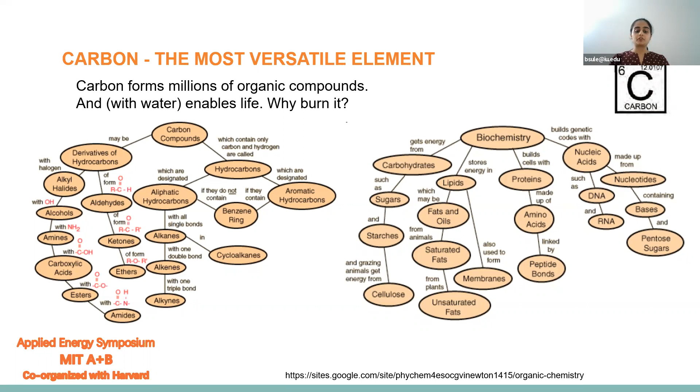Our topic for today's presentation is Shale Gas to Carbon Fiber, a cleaner pathway from fossil fuels to the hydrogen carbon economy. Carbon is the most versatile element and forms millions of organic compounds. Carbon, along with water, enables life. So our main argument is that we should value carbon so much that we should not burn it as a fuel, and instead use it to make more valuable products.

The use of carbon fibers has been increasing in recent years, and in terms of large volume applications, there is a great potential to expand the market for structural material based on carbon fiber that can replace steel and aluminum. However, the cost of carbon fiber currently is around $10 per kg, which is very high as compared to steel, which is less than $1 per kg. Thus, one of the main challenges is to reduce the cost of carbon fiber in order to make it suitable to replace steel in large volume applications.

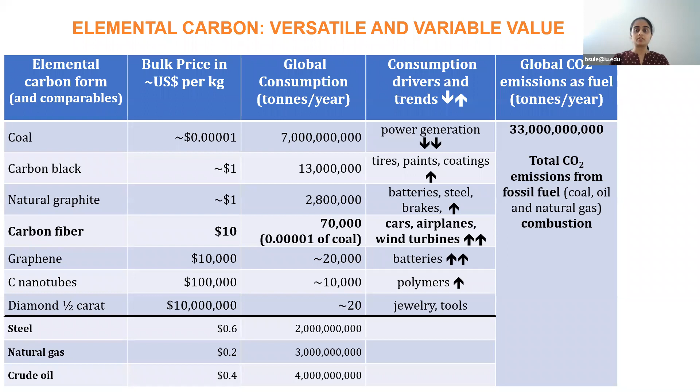The table also shows the global consumption of other fossil fuels, natural gas and crude oil, and also the global CO2 emissions due to combustion of all the fossil fuels. This carbon is not only too valuable to oxidize, but it is also too dangerous when oxidized. It forms carbon monoxide, which is a toxin, as well as carbon dioxide, which is a greenhouse gas, which has huge environmental issues.

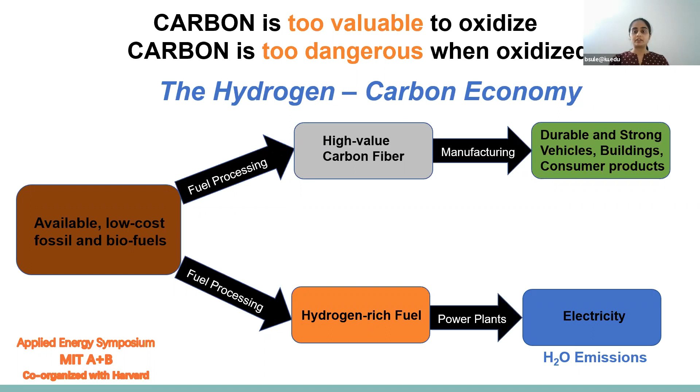The idea behind the hydrogen carbon economy is that the available low-cost fossil and biofuels can be processed in such a way that the carbon and hydrogen components of it can be separated. The hydrogen part can be used as a hydrogen fuel or hydrogen-rich fuel in power plants to generate electricity, and it is also harmless in terms of emissions. From the remaining carbon part of hydrocarbons, you can get high-value carbon products such as carbon fiber, which has great potential as a structural material in vehicles, buildings, and consumer products.

US has abundant gaseous fuels like natural gas, and shale gas has a large proportion of ethane in it. In ethane, about half of the energy content comes from carbon and about half of it comes from hydrogen. Thus, if you separate the hydrogen and carbon part, you would still have roughly about half of the energy in the form of hydrogen, which you can burn and use as a fuel. And the remaining carbon part, you can use to make some useful product or a more valuable product.

So carbon, when oxidized, forms carbon dioxide, which, just like water, has no useful energy content. Thus, if you want to make something useful now from carbon dioxide, you need to add energy to it. So our main argument is that we should stop generating carbon dioxide in the first place, and instead use the carbon to make some useful product from it.

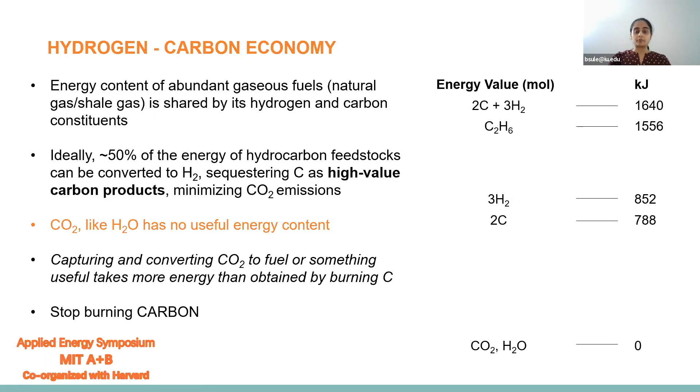Two of the high value carbon products that are used as structural materials are carbon nanotubes and carbon fiber. Multi-wall carbon nanotubes have the highest tensile strength of any material, and they have a tensile specific strength of about 1,000 times that of low carbon steel.

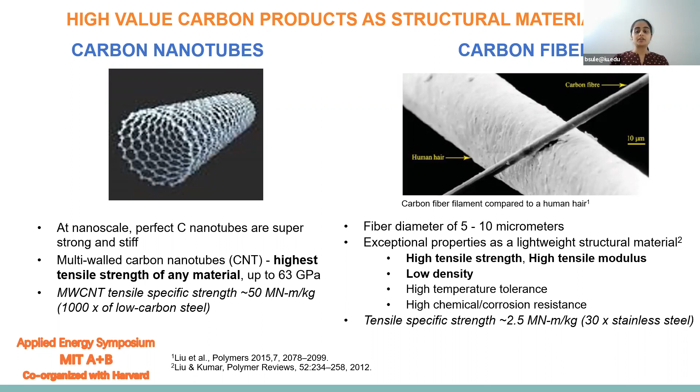Carbon fiber also has exceptional properties as a lightweight structural material. It has high tensile strength, high tensile modulus, as well as high chemical corrosion resistance, and has a tensile specific strength of 30 times that of stainless steel. However, carbon nanotubes are currently very expensive for use in large volume applications, and our focus today is on carbon fiber, particularly carbon fiber from shale gas.

Carbon fiber has many applications in aerospace, high-end automobiles, sports equipment, wind turbines, and pressure vessels. Roughly a quarter of it is used in wind turbines, and a significant proportion is also used in the aerospace industry. Some part is used in automotive as well as pressure vessels. These four applications make about 51% of the total carbon fiber market in the US.

Carbon fiber is also considered a clean energy technology since it is useful for pressure vessel applications for storage of compressed natural gas and hydrogen.

Currently, carbon fiber is only used in high-end automobiles because it is expensive. But if you could somehow bring the price down, then you can use it in all automobiles that are there today, and that would mean a very large-scale market for carbon fiber.

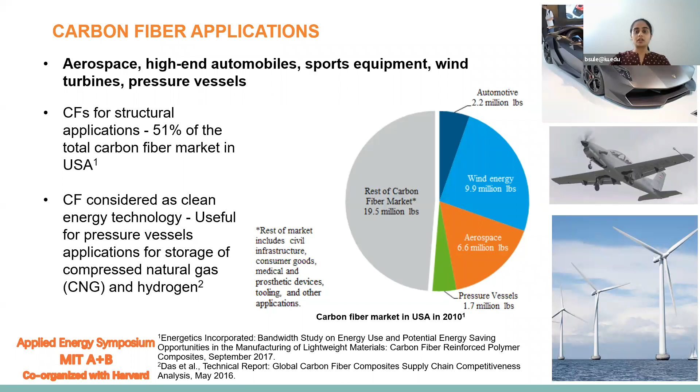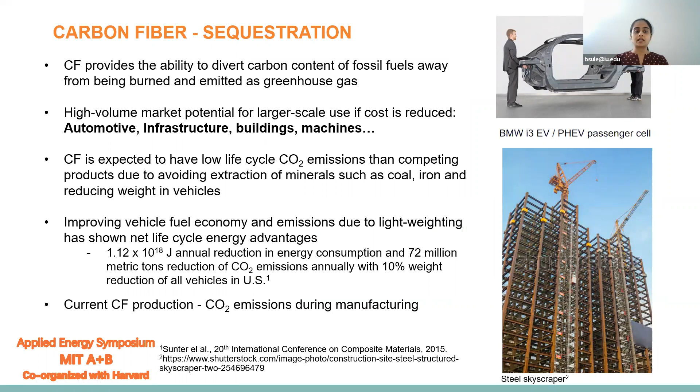Use of carbon fiber in large volume applications such as automobiles provides the ability to divert the carbon content of fossil fuels away from being burned and emitted as greenhouse gas. Carbon fiber is expected to have lower life cycle CO2 emissions than competing products due to avoiding extraction of minerals such as coal, iron, and reducing weight in vehicles.

If you consider a mid-sized steel car of around 1500 kg curb weight and replace the steel structural components with carbon fiber, there is a potential annual carbon fiber demand for the automotive industry of around 1500 million pounds, whereas the current automotive market in the US is only 2.2 million pounds. Thus, there is a large volume market opportunity for carbon fiber in the automotive industry.

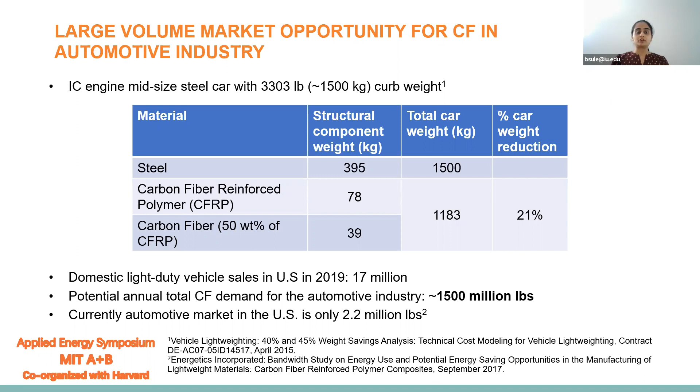Now coming to the carbon fiber precursor. These precursors are key to carbon fiber, and there are various organic polymers such as polyacrylonitrile derived from petroleum, which is the most common precursor used in carbon fiber manufacturing currently, and it forms the best quality carbon fibers. The other precursors are rayon and petroleum pitch.

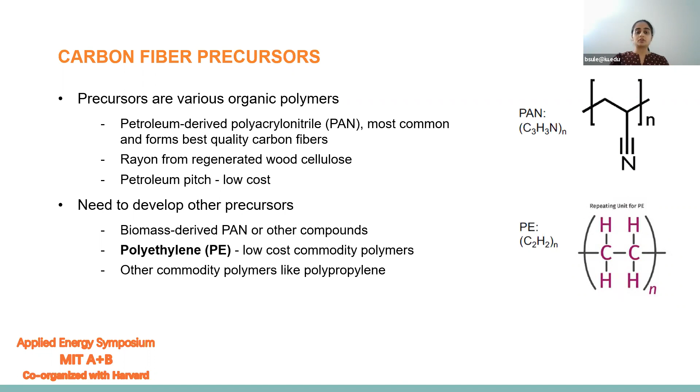There is a need to develop other low-cost precursors, and one such is polyethylene, which is a low-cost commodity polymer.

The major steps in carbon fiber manufacturing are polymer precursor synthesis, fiber spinning, thermal stabilization, carbonization, and the final step is surface treatment. Out of the total carbon fiber annually produced, more than 90% is PAN-based due to the high fiber quality. Here you can see the PAN-based carbon fiber cost breakdown, and the PAN precursor accounts for more than 50% of the carbon fiber cost. This is due to the expensive solution spinning process as well as the high commodity price of PAN.

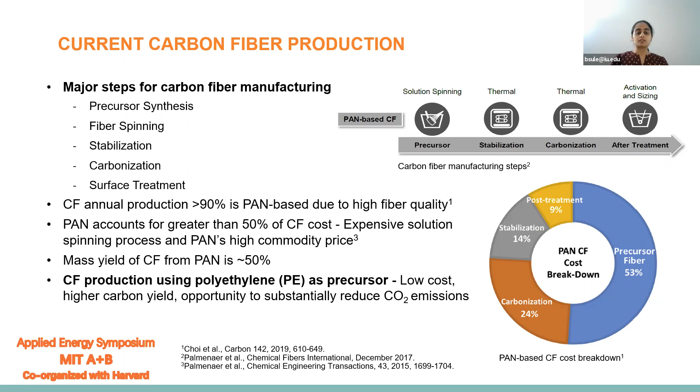Carbon fiber using polyethylene as precursor provides advantages like low cost, low processing cost, and high carbon yield.

Here you can see the different types of applications of carbon fiber. Aerospace applications particularly require carbon fiber with very high tensile strength and tensile modulus, and currently this requirement is satisfied by PAN-based carbon fiber. Whereas automotive applications are not as demanding as aerospace applications in terms of tensile strength and tensile modulus requirements, these automotive requirements could be met with cheaper precursors such as polyethylene.

Currently, carbon fiber made from polyethylene falls in the range shown here, with a tensile strength of up to 2.5 gigapascals.

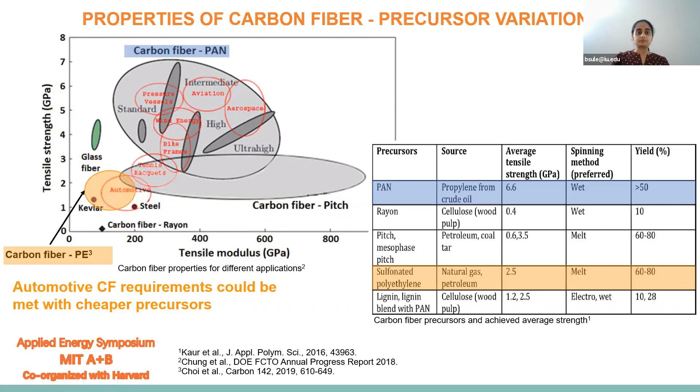Polyethylene is made from polymerization of ethylene, which is the world's most ubiquitous and cheapest plastic. The different forms of polyethylene constitute 29.3% of worldwide plastic production. This mass production of polyethylene gives it an advantage in terms of low price and abundant supply to be used as a potential precursor for carbon fiber manufacturing.

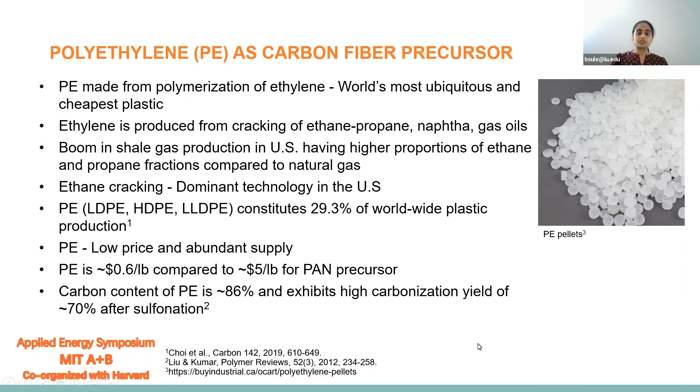The carbon content of polyethylene is also very high, 86%, and it exhibits a high carbonization yield of 70% after sulfonation. So there is a lot of research going on the use of polyethylene as a carbon fiber precursor. What we are trying to do is take a high-level thermodynamic view to assess the energy use and carbon dioxide emission in this entire process from shale gas to carbon fiber.

So we can see whether it is justified to promote this as a way to sequester carbon and have a pathway to high-value products from carbon.

This slide shows the entire process from shale gas to carbon fiber divided into three stages. The first is the shale gas to ethylene step, in which the raw shale gas is processed to form methane-rich pipeline gas, and the natural gas liquids ethane and propane are recovered. The ethane-propane mixture is cracked in the steam furnace to form olefins, and the different olefins, ethylene, propylene, and higher

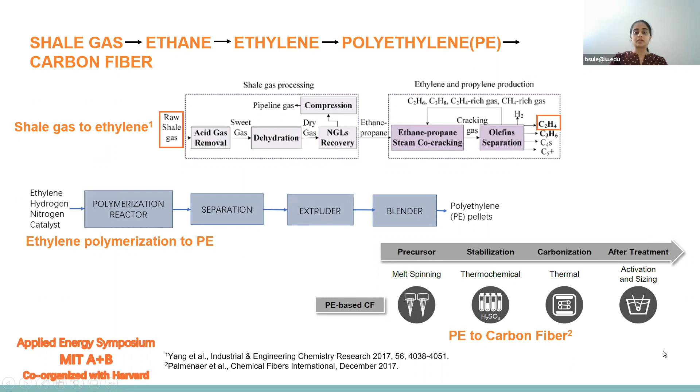C4, C5 carbon compounds are separated. The second step is the ethylene polymerization to polyethylene pellets. The last step is the conversion of polyethylene to carbon fiber, which has similar steps as in the PAN-based process. However, some steps are different.

This diagram shows the cost comparison between the PAN-based and PE-based carbon fiber fabrication processes. One of the major differences is that in the fiber spinning step, for the PE-based process, melt spinning can be used instead of the expensive solution spinning used for PAN precursor. This reduces the processing cost at this stage by about 91%.

Another major difference is that polyethylene is a thermoplastic, so it has a lower melting point of around 140 degrees C. Therefore, it requires some pre-treatment, that is, thermochemical stabilization using a sulfuric acid bath prior to the carbonization process. This actually increases the processing cost at this stage compared to the thermal stabilization for PAN precursor.

However, overall, the cost in the PE-based fabrication process is significantly lower compared to the PAN-based process. By using polyethylene as a precursor, the carbon fiber cost can be brought down to about $16 per kg from around $26 per kg.

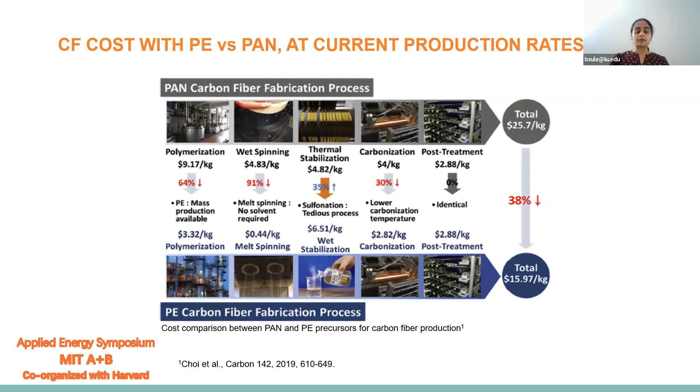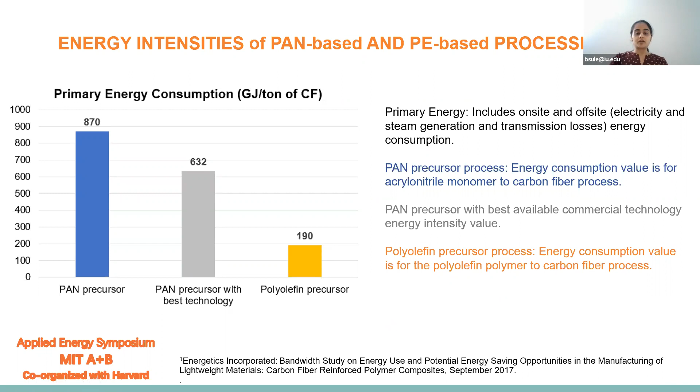If further the polyolefin precursor is used, then this energy consumption can be brought down to 190 gigajoules per ton of carbon fiber. This shows us that with PE-based carbon fiber, there is a substantial opportunity not only for diverting the carbon content of fossil fuels into a high-value form of carbon, but also by having a very low energy intensity in the final carbon fiber that is created.

There are some challenges in the production of PE-based carbon fiber. One is in the high temperature sulfonation process, which generates toxic SOx fumes that must be scrubbed to comply with safety regulations. The second and most important one is that PE-based carbon fiber currently has inferior properties compared to PAN-based carbon fiber, and therefore it is not suitable for aerospace and pressure vessel applications.

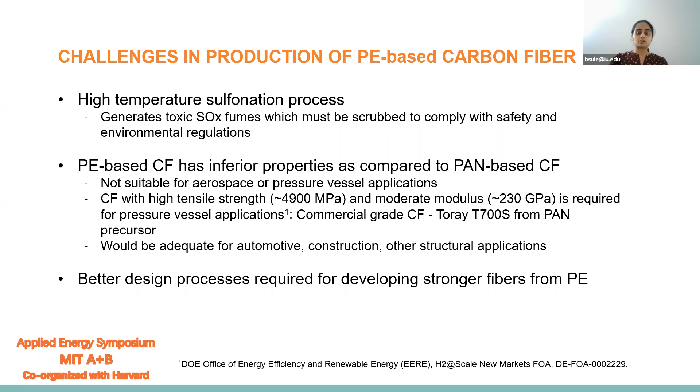However, they would be adequate for automotive, construction, and other structural applications. There is research on PE-based carbon fiber at the Carbon Fiber Technology Facility at Oak Ridge National Laboratory. Also, there is research at Penn State University on development of polyolefin precursors for high-strength, low-cost carbon fibers for pressure vessel applications.

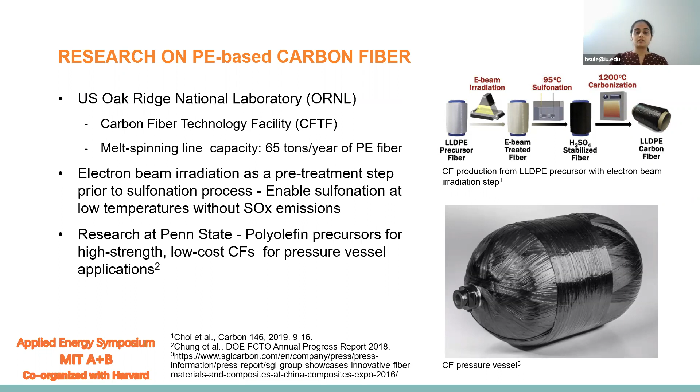Just to conclude, there is high potential for vastly expanded structural use of carbon fibers in automotive, buildings, and infrastructure. Economic viability of using polyethylene precursors for carbon fibers is possible due to the abundant availability of shale gas.

PAN-based carbon fiber currently has a high amount of embodied energy compared to aluminum or steel. However, this energy intensity can be reduced by improving process efficiencies and also waste energy recovery. The low weight and high tensile specific strength of carbon fibers would provide net benefit in life cycle energy use and reduce CO2 emissions for aircraft and automobiles.

With more R&D of PE-based carbon fibers, there is potential for revolution in manufacturing due to the availability of low-cost, lightweight, and immensely strong structural material for large volume applications, which can also sequester carbon in valuable form. Thank you.